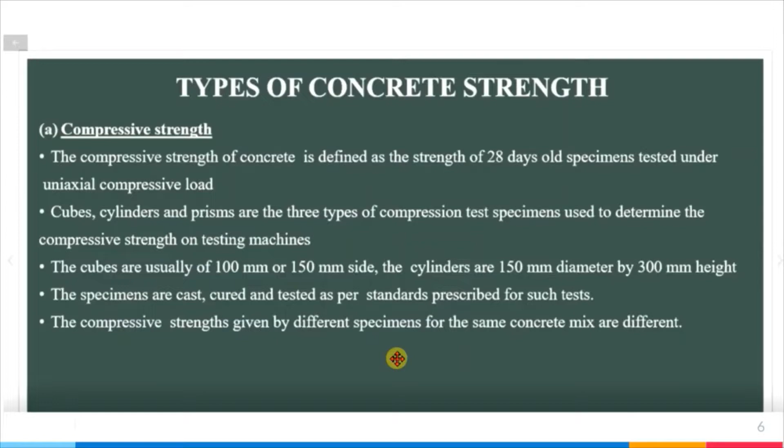The compressive strength of concrete is defined as the ability of the concrete to withstand specific compressive forces. Compressive strength of concrete depends on many factors such as water-cement ratio, cement strength, quality of concrete material, quality control during production of concrete, etc.

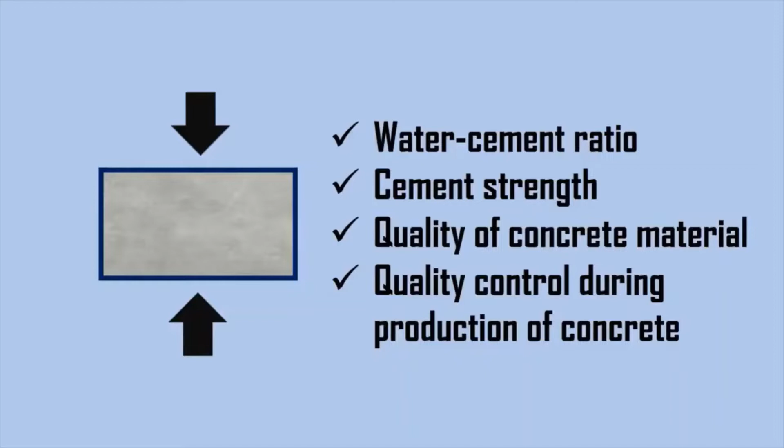Generally, the specimens shaped in cube and cylinder are used for testing the compressive strength of concrete. The standard size of a cubical specimen is 150 mm by 150 mm by 150 mm, while the cylindrical specimen is 150 mm in diameter and 300 mm in length.

Generally, the fresh concrete is prepared according to the required grades and the respective mix proportion. Once the fresh concrete is prepared, the inner surface of the mold is greased to avoid sticking of concrete. The prepared fresh concrete is then filled in the mold in 3 layers.

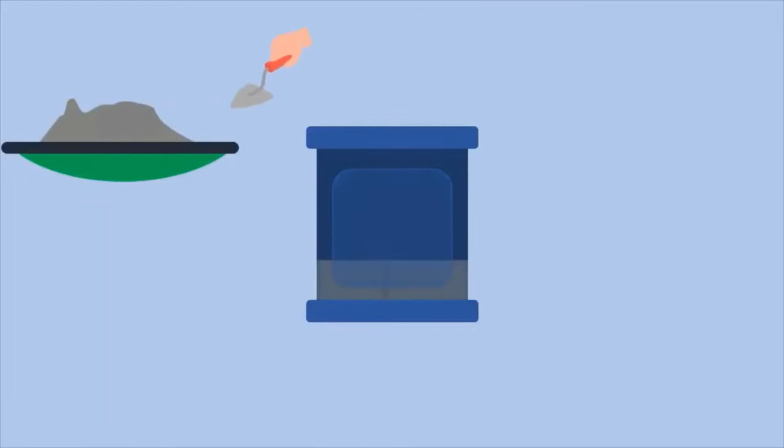After filling each layer, tamping should be done 35 times for cube and 25 times for cylinder using a standard tamping rod. Once the mold is filled, level off the top surface with a trowel.

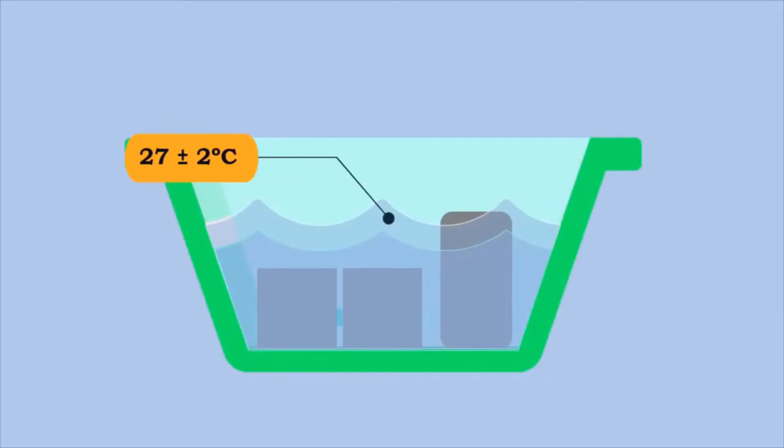After a day, the mold is removed and the specimens are dropped into the curing tank at a standard temperature of 27 plus or minus 2 degrees Celsius. After 7 days, the specimen is taken out of the curing tank and dried for a while.

Then the specimen is placed on the compression testing machine. The cube specimen is just placed on the bearing plate, while for the cylindrical specimen, it is placed vertically. The instrument is adjusted such that the plate touches the top surface of the specimen.

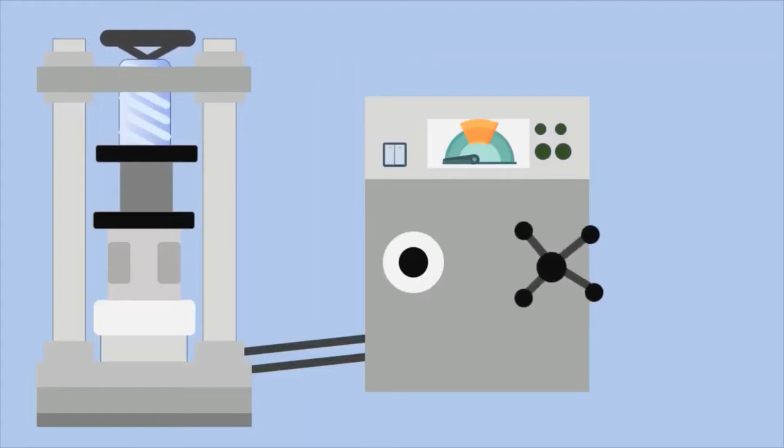The load is applied gradually over the specimen at the rate of 140 kg per centimeter square per minute. The load at which the specimen fails is noted. Thus, the characteristic compressive strength is calculated from the ratio of load and area.

The test is generally done with the help of 3 specimens and tested for 7 days, 14 days and 28 days. Next is tensile strength.

The tensile strength of concrete is much lower than the compressive strength, because of the ease with which the crack can propagate under tensile loads. Tensile strength of concrete is measured in 3 ways.

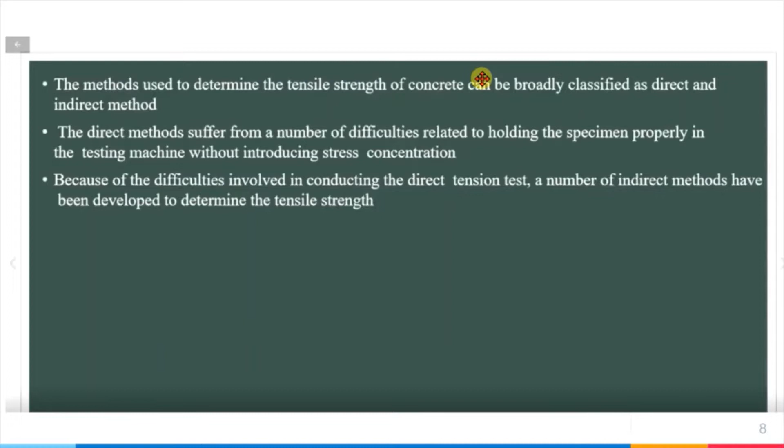Split tensile strength test on concrete. In the split tensile strength test, the tensile strength of concrete is obtained by applying a compressive force along the length of the concrete cylinder.

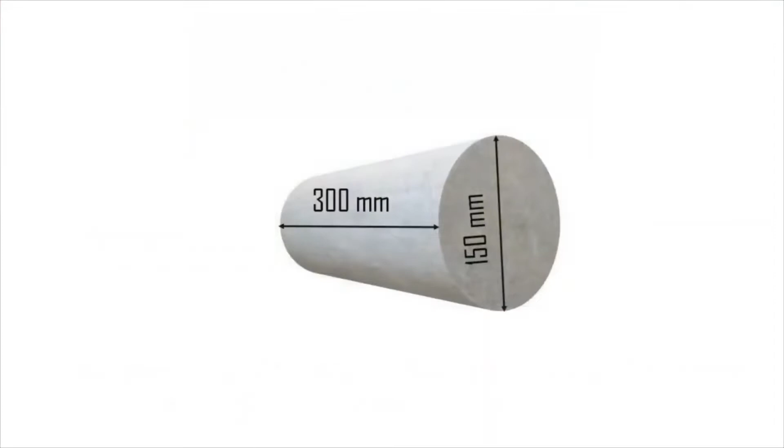The specimen used for this method is cylindrical in shape with dimensions of 150 mm in diameter and 300 mm in length.

The instrument used for this method is the universal testing machine. The specimen is prepared in the standard manufacturing procedure and placed in the mold in layers, tamped using 25 blows for each layer.

After a day, the mold is removed, and the specimen is placed in the curing tank at a temperature of 27 plus or minus 2 degrees Celsius.

Depending upon the requirement, the test specimen is removed from the tank and dried at 7, 14 and 28 days for testing.

The specimen is placed longitudinally in the machine. A bearing strip made up of plywood is placed on both sides of the specimen and aligned according to the marking.

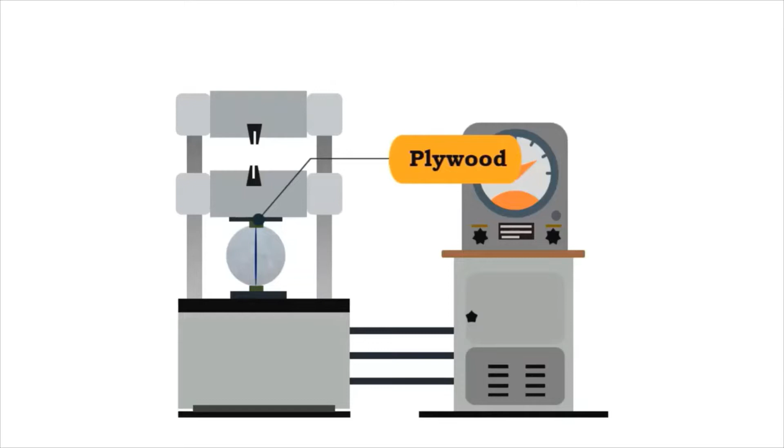Sometimes, supplementary bars are placed on top of the plywood depending upon the diameter of the specimen. Now, apply the load continuously at a rate within the range of 1.2 to 2.4 MPa per minute.

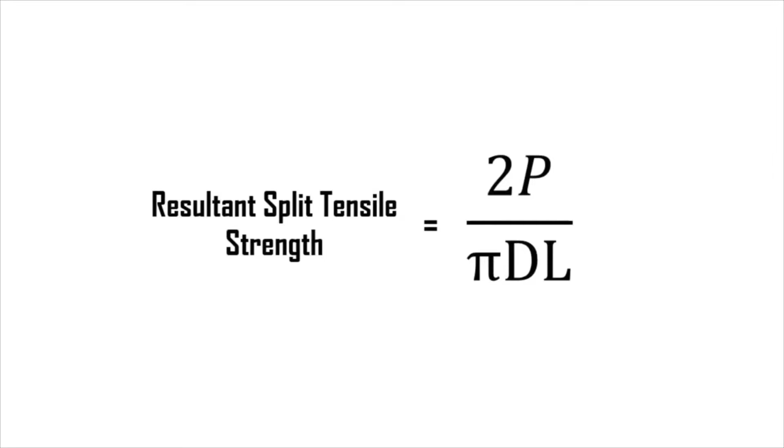Finally, note down the load at which the cylinder fails by developing cracks. The resultant split tensile strength is calculated by the equation 2P divided by pi into D into L, where P is equal to the load at which the specimen breaks.

And the third one is flexural strength. The determination of flexural tensile strength is essential to estimate the load at which the concrete members may crack.

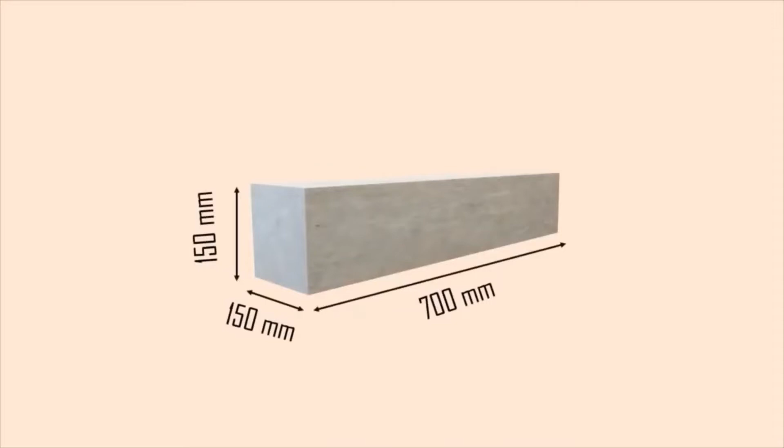The test is made on a beam of size 150 mm into 150 mm into 700 mm, or 100 mm into 100 mm into 500 mm.

Flexural strength of concrete is determined by either central point loading or two-point loading. The typical machine used for this test is shown on the screen.

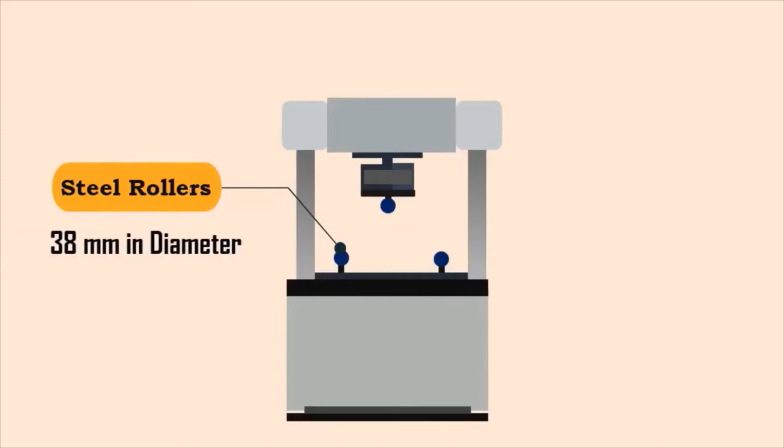The bed of the testing machine is provided with two steel rollers of 38 mm in diameter. The rollers are mounted at a distance from center to center of 600 mm for 150 mm specimens and 400 mm for 100 mm specimens.

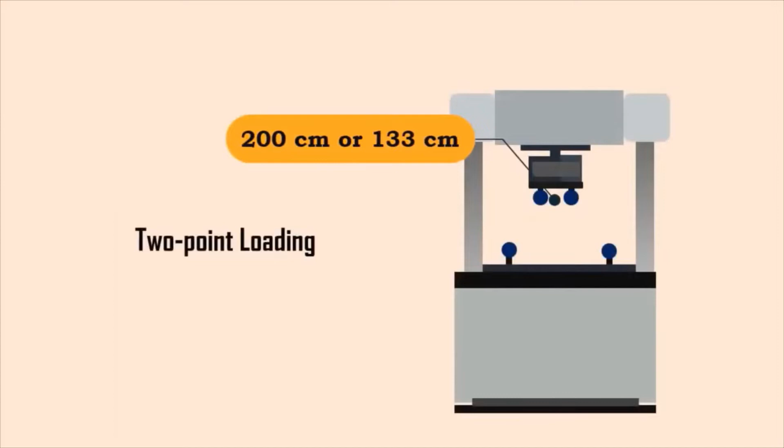The load is applied through a similar roller mounted at the top. In case of two-point loading, the rollers are spaced at 200 mm or 133 mm center to center.

The concrete is prepared as per the required grade of concrete and placed in the mold in layers, tamped 25 blows for each layer.

After a day, the mold is removed, and the specimen is placed in the curing tank at a temperature of 27 plus or minus 2 degrees Celsius.

Depending upon the requirement, the test specimen is removed from the tank and dried at 14 and 28 days for testing.

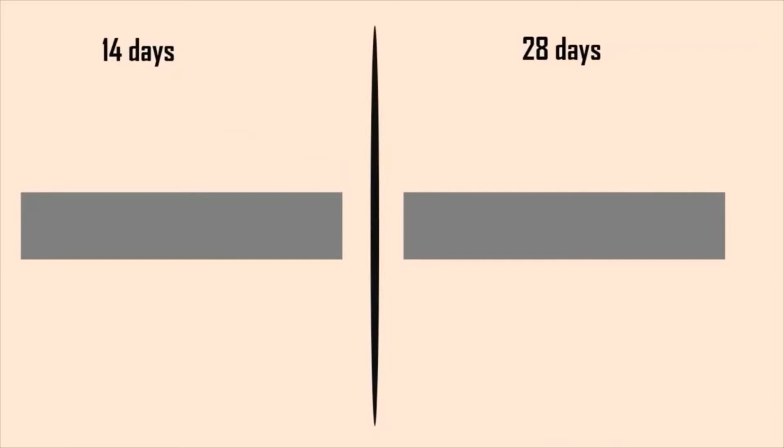The specimen is placed on the rollers and centered with the longitudinal axis of the specimen.

The load is applied at a rate of 400 kg per minute for the 150 mm specimens, and at a rate of 180 kg per minute for the 100 mm specimens.

Finally, note down the load at which the specimen fails by developing cracks. Now, measure the distance between the line of fracture and the nearest support. Consider this as A.

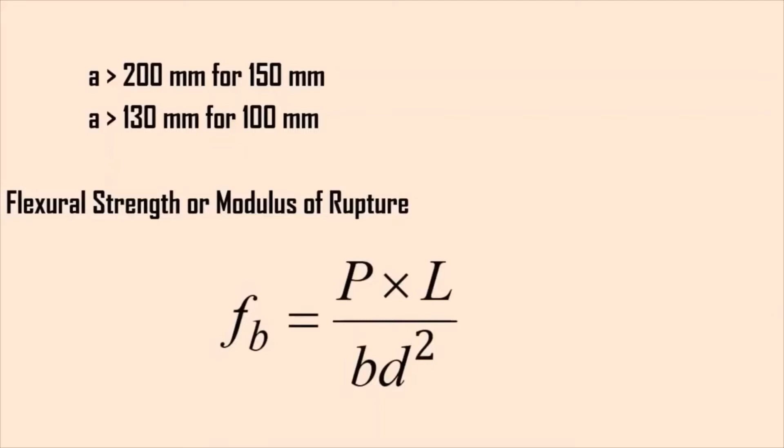If A is greater than 200 mm for the 150 mm specimen and 130 mm for the 100 mm specimen, then the flexural strength or modulus of rupture, Fb, is calculated by the equation Fb equals P into L divided by B into d squared.

If A is less than 200 mm and greater than 170 mm for 150 mm, and less than 133 mm and greater than 110 mm for a 100 mm specimen, then flexural strength or modulus of rupture, Fb, is calculated by the equation Fb equals 3Pa divided by Bd square,

where B is the width of the beam in millimeters, D is the failure point depth in millimeters, L is the supported length in millimeters, P is the maximum load applied to the beam in kilograms, and A is the distance between the line of fracture and nearest support in millimeters.

Next is factors affecting strength of concrete.

Strength of concrete.

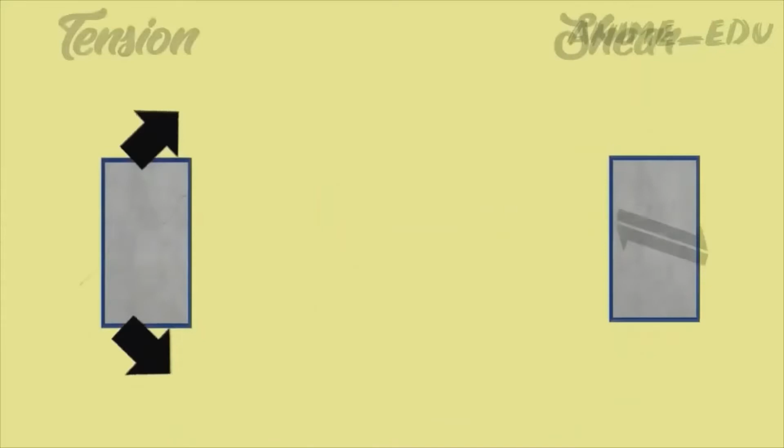The quality of concrete is judged largely on the strength of that concrete. We all know that concrete is strong in compression but weak in tension. In most structural applications, concrete is employed primarily to resist compressive stresses. In cases of concrete in tension or shear, the compressive strength is frequently used to measure these properties. Thus, the compressive strength of concrete is used as a qualitative measure for the various properties of hardened concrete.

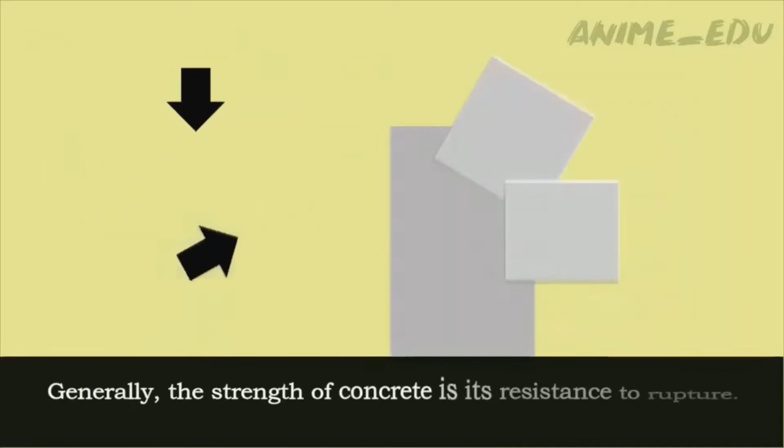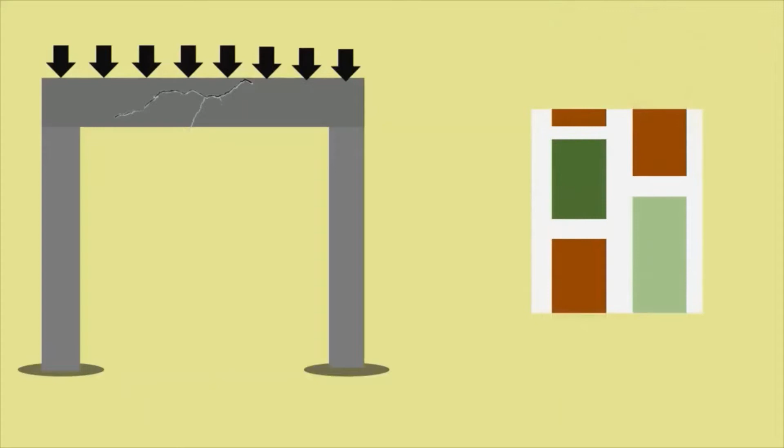Generally, the strength of concrete is its resistance to rupture. It can be measured in a number of ways, such as strength in compression, strength in tension, strength in shear, and strength in flexure. These strengths of concrete are calculated by various methods which will be discussed in future videos.

When concrete fails under a compressive load, the failure is essentially a mixture of crushing and shear failures. However, the mechanics of failure is a complex phenomenon. In general, concrete in resisting failure generates both cohesion and internal friction. This cohesion and internal friction are related to a single parameter called the water-cement ratio.

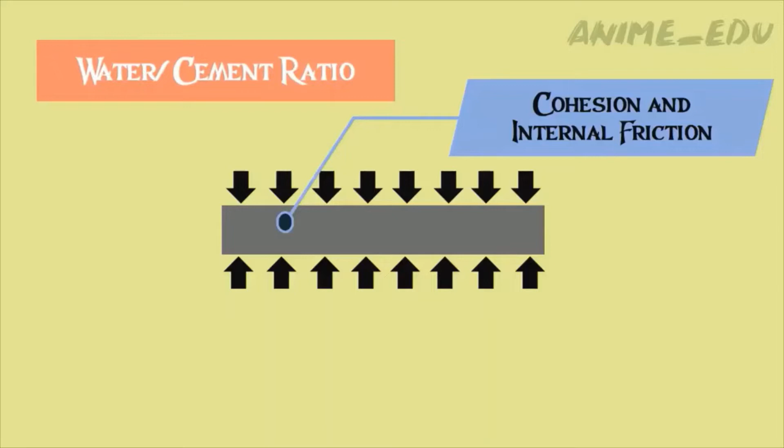Besides, the strength of concrete is influenced by the following factors: ratio of cement to mixing water, ratio of cement to aggregate, grading, surface texture, shape, strength and stiffness of aggregate particles, and maximum size of aggregate. The water-cement ratio primarily affects the strength, whereas other factors indirectly affect the strength of concrete by affecting the water-cement ratio.

Water-cement ratio of concrete.

As we have seen in the previous video on strength of concrete, the strength of concrete is mostly influenced by the water-cement ratio. Let's deal with it in this video. The water-cement ratio is also responsible for the porosity of the hardened cement paste.

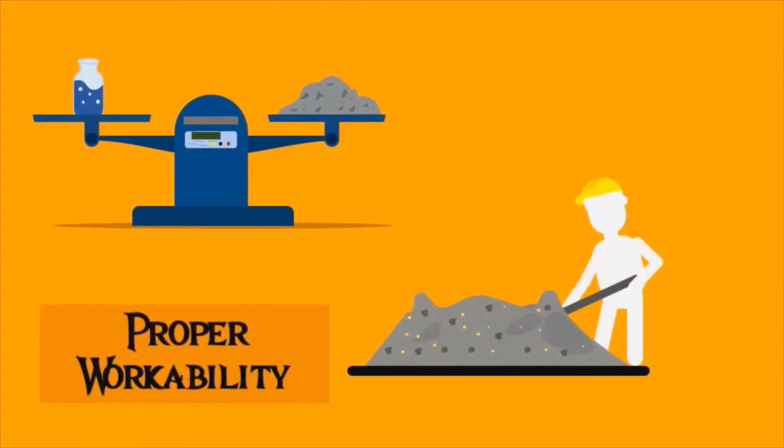Water-cement ratio is stated as the amount of water used to the significant amount of cement in the mixture by weight. For proper workability, the water-cement ratio varies from 0.4 to 0.6. However, the maximum strength of concrete is obtained at a water-cement ratio of 0.4. Besides, we know that for complete hydration of concrete, the water requirement is about 38%.

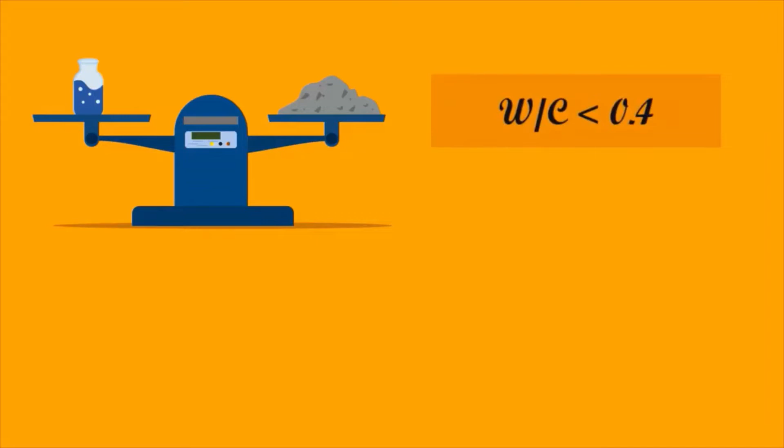Space ratio of concrete. Abrams' water-cement ratio law has several limitations. Researchers do not agree to call it a law, rather they said it to be a rule.

In general, the strength at any water-cement ratio is a function of degree of hydration of the cement and its physical and chemical properties, temperature at which hydration takes place, formation of cracks due to bleeding and shrinkage, air content in case of air-entrained concrete, and change in the water-cement ratio.

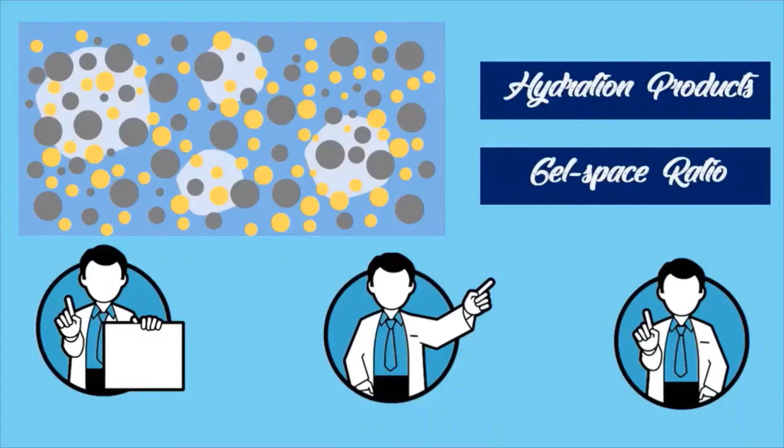With these, some researchers stated that the strength of concrete can be related to the hydration products, that is, gel space ratio. Gel space ratio is defined as the ratio of volume of hydrated cement paste to the sum of the volumes of the hydrated cement and that of the capillary pores.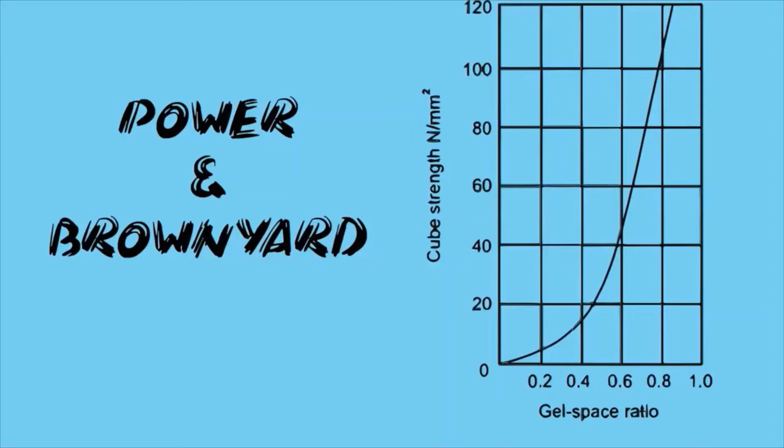A relationship between the strength of concrete and gel space ratio is established by Power and Brownyard. A typical curve relating gel space ratio to the compressive strength is displayed. The strength of concrete considering gel space ratio is calculated by S equals 240 x cube, where S is the strength of concrete, X is the gel space ratio, and 240 is the intrinsic strength of gel in Newton per millimeter square for the type of cement and specimen used.

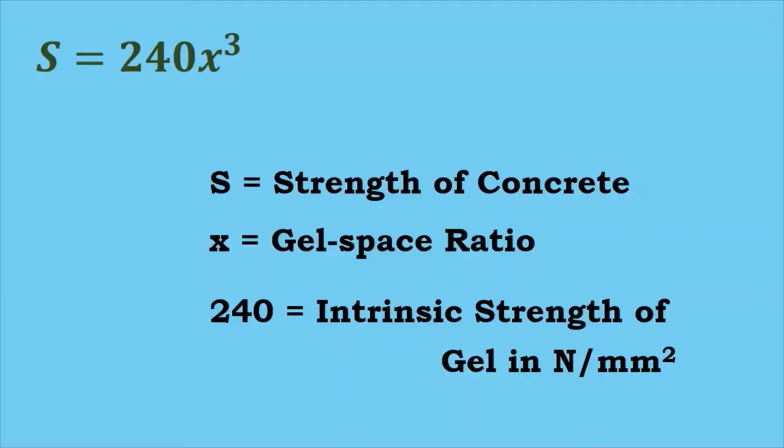Effect of maximum size of aggregate on strength of concrete. In earlier days, researchers thought that the use of larger size aggregates leads to higher strength. They thought that the larger the aggregate, the lower is the total surface area.

Thus, a lesser amount of water is required to get the desired workable concrete. So a lower water-cement ratio can be adopted to get higher strength.

Over the period, researchers found that large size aggregate does not contribute to higher strength of concrete in real applications. This is due to the maximum size aggregate giving a lower surface area for development of gel bonds, which is responsible for the lower strength of the concrete.

Bigger aggregate size causes more heterogeneity in the concrete, which prevents the uniform distribution of load when stressed. There is also a possibility of internal bleeding and development of microcracks, which results in lower compressive strength.

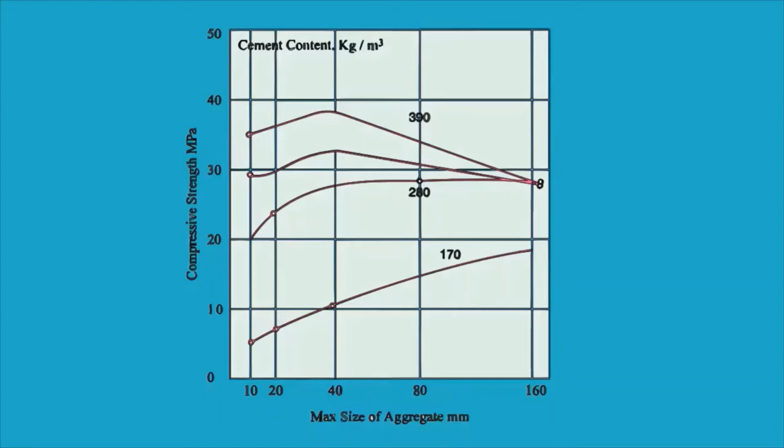The influence of the maximum size of aggregate on compressive strength of concrete is shown in the graph. The graph represents the influence of the size of aggregate on the compressive strength of concrete for different cement contents. Effect of compaction on strength of concrete.

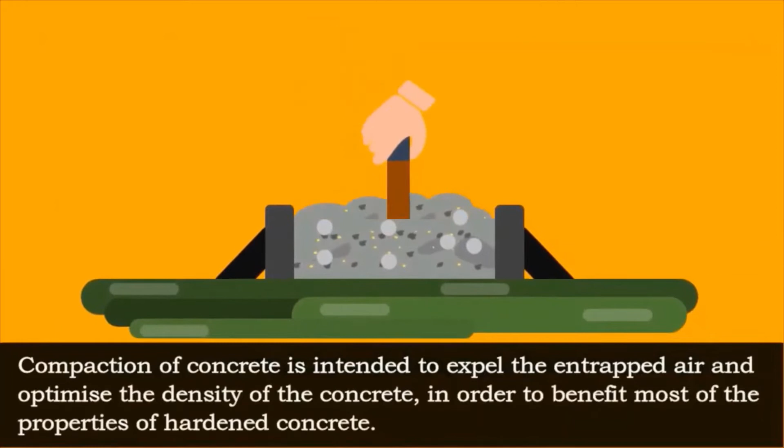We know that compaction of concrete is intended to expel the entrapped air and optimize the density of the concrete, in order to benefit most of the properties of hardened concrete. We have seen more about this in the video on compaction of concrete.

Inadequate compaction leading to air void contents of 5% and 10% result in a loss of strength of 30% and 50%, respectively.

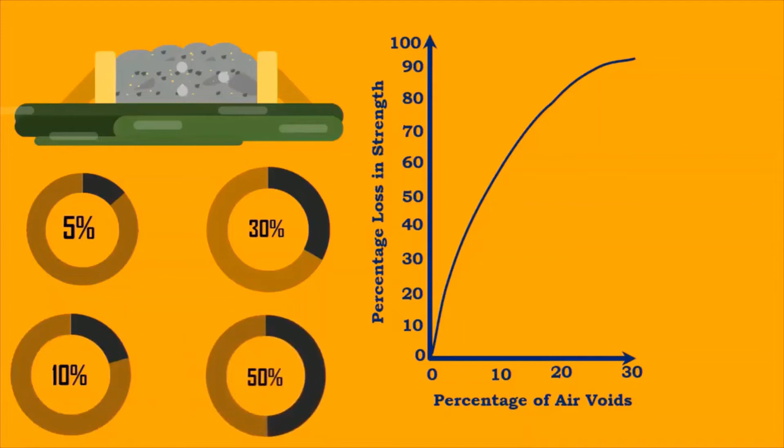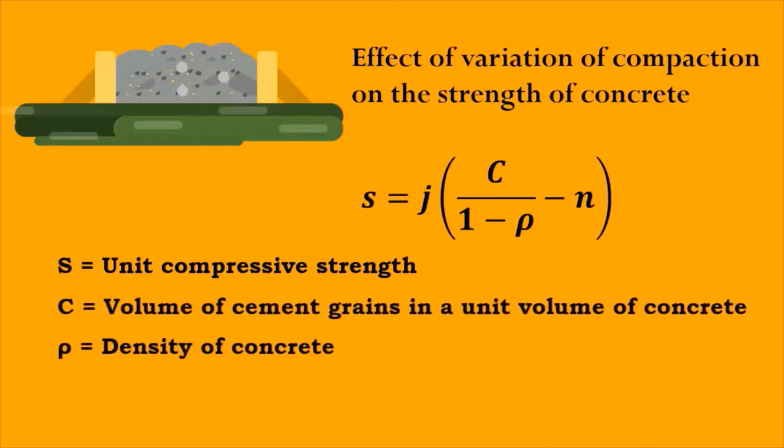The effect of variation of compaction on the strength of concrete is calculated with the help of the equation S equals J into C divided by 1 minus rho minus N, where S is the unit compressive strength, C is the volume of cement grains in the unit volume of concrete, rho is the density of concrete, and J and N are constants.

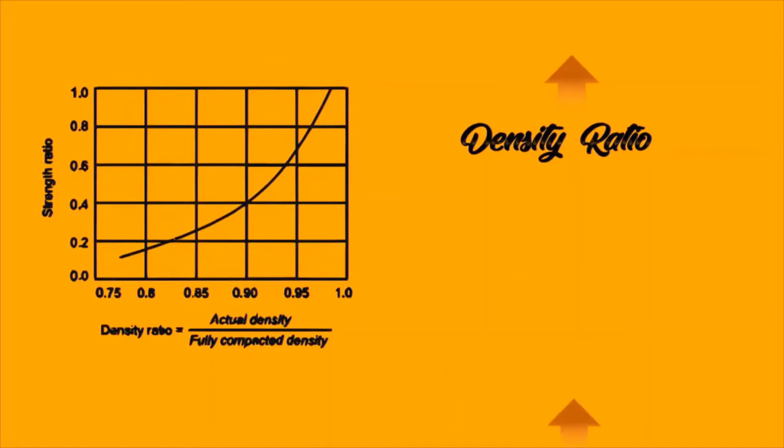The effect of degree of compaction on strength is given by the graph shown on the screen. The higher the density ratio, the higher would be the concrete strength ratio. Highly compacted concrete yields a higher density ratio, which in turn results in higher strength of concrete.

Effect of mixing time on strength of concrete. Generally, if the concrete is mixed for a longer period, it results in being uneconomical from the point of production rate. Therefore, it is important to mix the concrete for such a duration which will accrue optimum benefit.

The strength of concrete increases with increase in time of mixing up to 2 minutes, beyond which no significant improvement is observed.

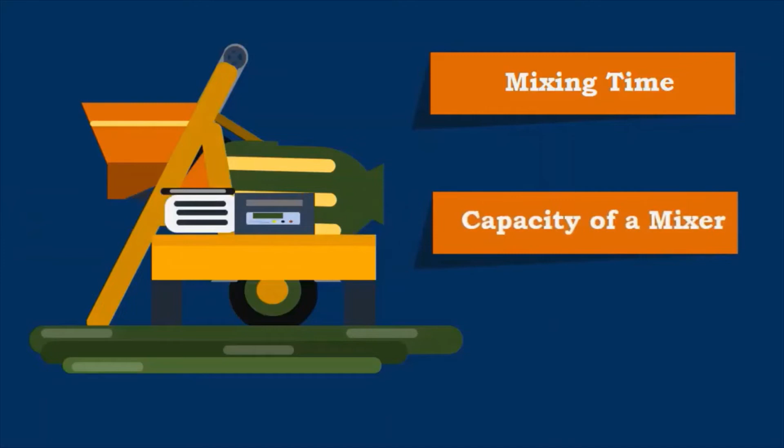In case of a machine mixer, the mixing time is related to the capacity of the mixer. The mixing time varies between 1 minute 30 seconds to 2 minutes 30 seconds. Bigger the capacity of the drum, more is the mixing time.

The increase in strength with respect to increase of mixing time may be due to the improvement of workability because of excess fines formed due to the abrasion and attrition of coarse aggregate in the mix.

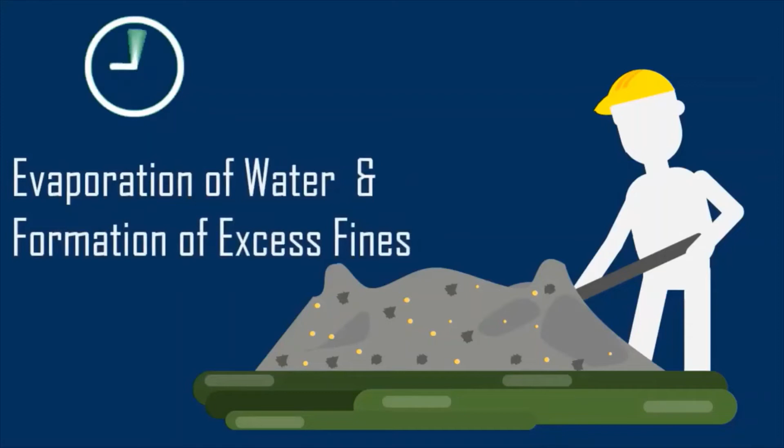However, mixing of concrete over long periods results in evaporation of water and formation of excess fines, which may reduce the workability and hence bring about a reduction in strength. The excess fines may also cause greater shrinkage. Thus, it is important to maintain optimal mixing time.

Effect of air voids on strength of concrete. Air voids are generally formed because of the evaporation of water used in making concrete and by entrained air.

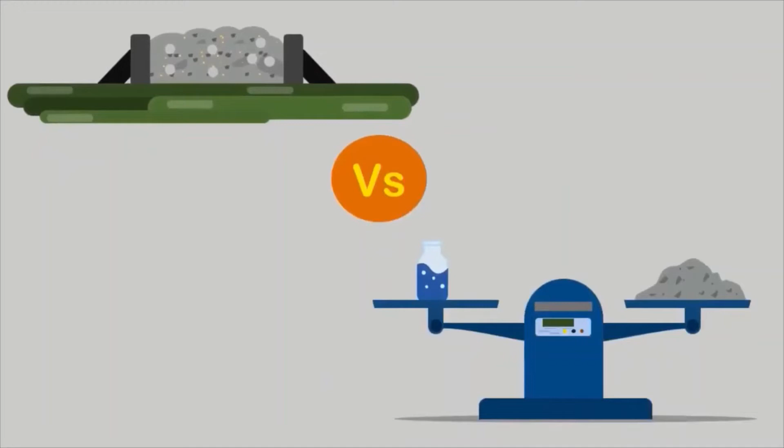In general, air voids in the concrete depend on the water-cement ratio. There is an increase in air voids with an increase in the weight of water. When this situation happens, the strength of the concrete drops down.

However, hardened concrete contains about 1% of air voids. If the water used is more than the optimum water required for maximum strength of concrete, the concrete becomes permeable and susceptible to deterioration.

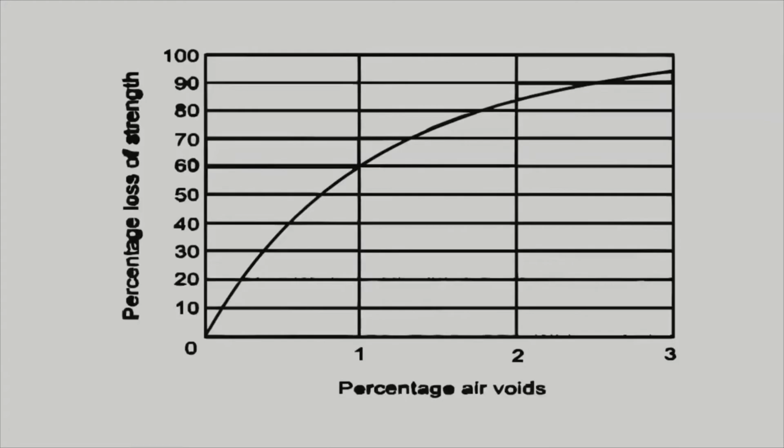Maturity concept of concrete. The strength of concrete depends upon both time and temperature during the early period of gain in strength. The maturity of concrete is defined as the summation of the product of time and temperature.

Its units are degree Celsius hour or degree Celsius days.

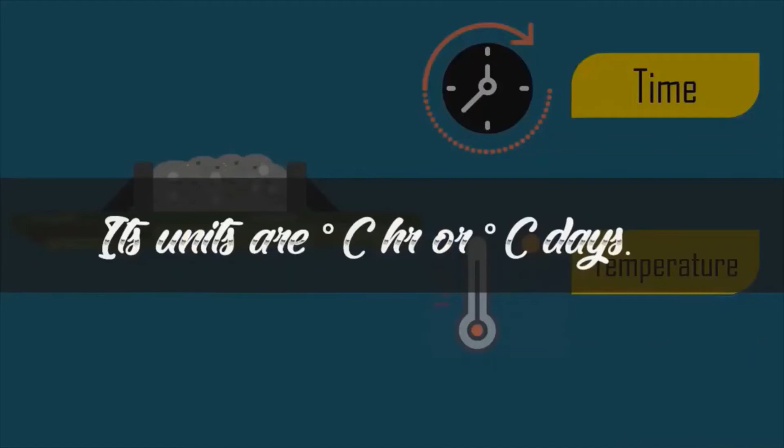Relation between compressive and tensile strength of concrete. We know that concrete is strong in compression, weak in tension. Thus, in most concrete construction, the compressive strength of concrete is taken into consideration, and the tensile strength of concrete is ignored.

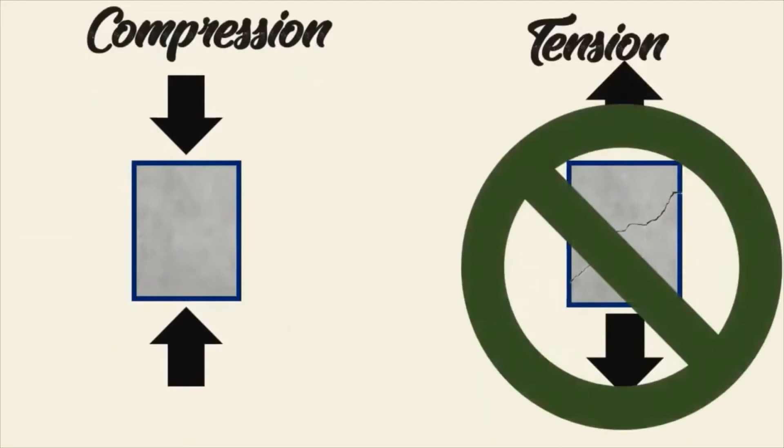Besides, the design of concrete pavement slabs and roads depends on the flexural strength of concrete. Therefore, it is important to calculate the flexural strength of concrete. We have some methods for determining the flexural strength of concrete.

However, the determination of compressive strength of concrete is easier. Thus, obtaining a relationship between compressive strength and flexural strength will help to determine the strength of concretes. Today we are going to see the relationship between compressive strength and flexural strength.

It is seen that strength of concrete in compression and tension, both direct tension and flexural tension, are closely related. From the extensive study carried out at Central Road Research Institute (CRRI), the following statistical relationship between tensile strength and compressive strength was established.

Where Y is the compressive strength of concrete in MPa and X is the flexural strength of concrete in MPa, the general relationship between flexural and compressive strength of concrete is given as Y equals 11x minus 3.4.

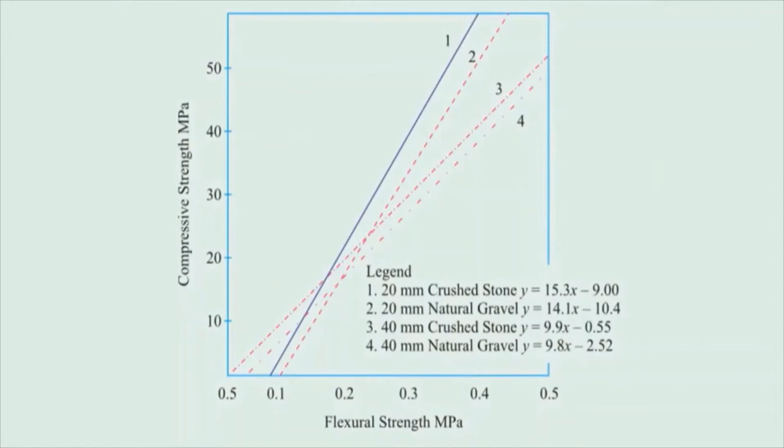The graph shown on the screen represents the relationship between compressive strength and flexural strength of concrete for various aggregates. In general, the flexural strength of concrete was found to be 8 to 11% of the compressive strength for higher ranges of concrete strength greater than 25 megapascals, and 9 to 12.8% for lower ranges of concrete strength less than 25 megapascals.

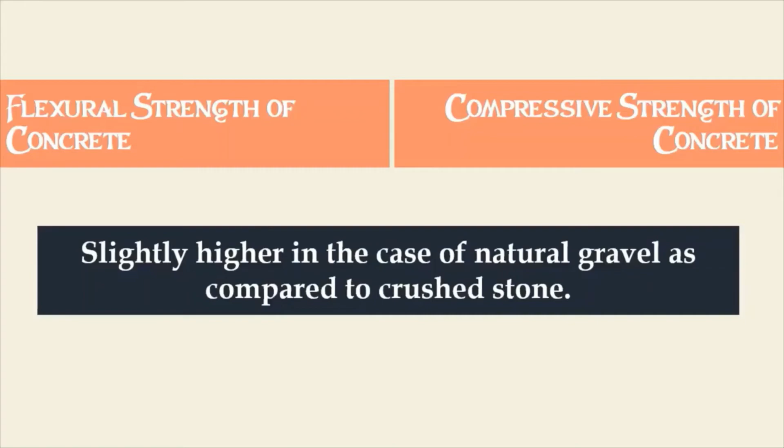The flexural to compressive strength ratio was higher with aggregate of 40 mm maximum size than with those of 20 mm maximum size. In general, the ratio was found to be slightly higher in the case of natural gravel as compared to crushed stone. Gain of strength of concrete with age.

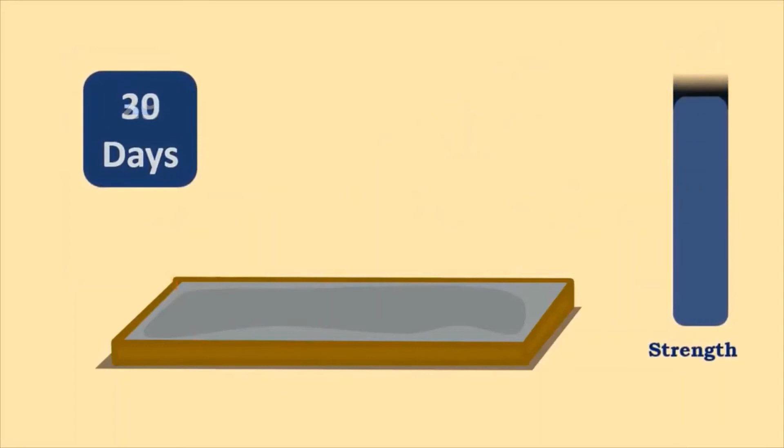In general, the strength of concrete is fast at the start and slows down with age. It is assumed that concrete attains its full strength in 28 days. Actually, this assumption is false. The concrete develops strength beyond 28 days too. However, the increase in strength beyond 28 days is not considered in the design.

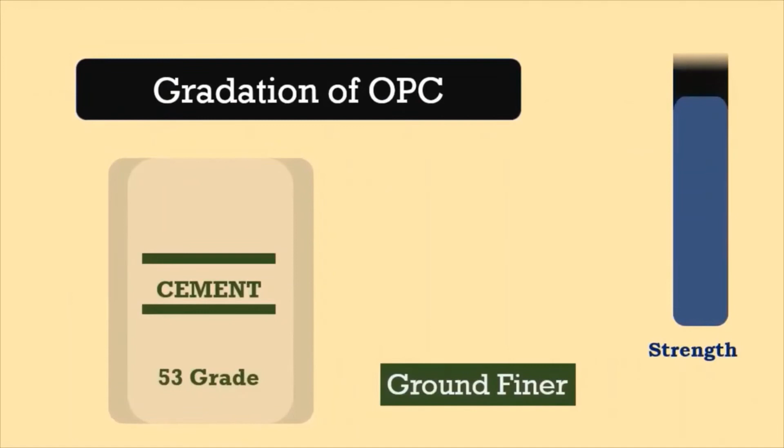As per the IS 269, 1976 code, only one type of cement was considered to have increased strength after 28 days. However, after the gradation of OPC, present-day cements, particularly 53 grade cement, being ground finer, show only nominal increase in strength after 28 days. Most of the strength development in well-cured concrete will have taken place by 28 days.

Therefore, in IS 456:2000, the clause is revised. It states there is normally a gain of strength beyond 28 days. The quantum of increase depends upon the grade and type of cement, curing and environmental conditions, etc. The design should be based on 28-day characteristic strength of concrete unless there is evidence to justify a higher strength for a particular structure due to age.

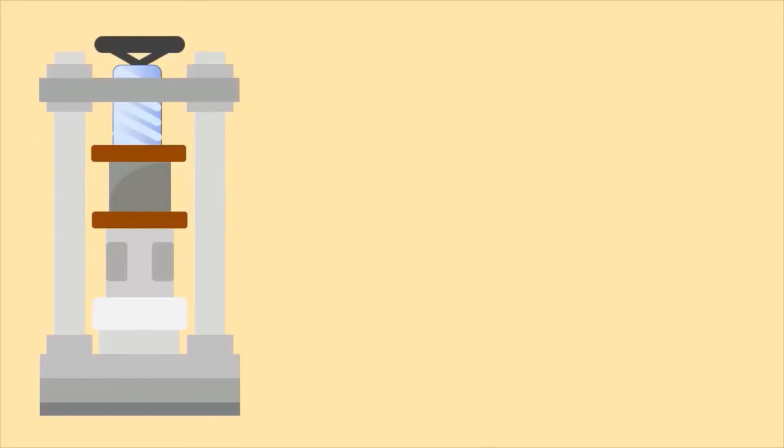Besides, it is also important to estimate the strength of concrete at an early age. It is not necessary to wait for 28 days to check the strength of concrete. Many researchers have attempted to estimate the strength of concrete at 1, 3 or 7 days and correlate it to 28-day strength.

These relations depend upon many factors such as the compound composition of cement, fineness of grinding, and temperature of curing, etc.

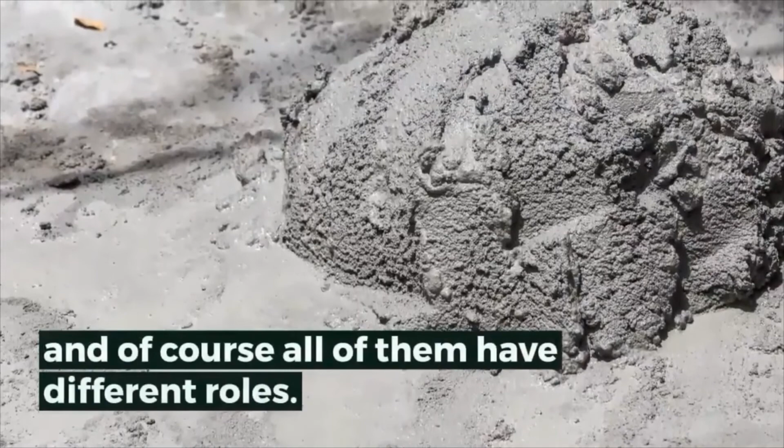Concrete is a widely used building material in the construction world. Concrete is made up of various ingredients, and of course, all of them have different roles. The properties of concrete generally rely on the mixing of concrete ingredients, such as cement, coarse aggregates, fine aggregates, and water.

The whole world wishes their structures to be strong and durable, and for that, they always design their structures according to the desired strength and service. Strength gives an overall indication of quality of concrete, as it is directly related to the lifelong performance of the concrete structure. The strength of the concrete shows the ability of the structure to withstand various loads such as dead load, live load, earthquake load, wind load, etc.

The strength of the concrete can be measured with different tests conducted on it, such as compressive strength, tensile strength, and flexural strength. Apart from the above tests, there are various factors that can also affect the strength of concrete. Highlights of those factors are described in this video. So, let's get started.

11 factors that can affect the strength of concrete.

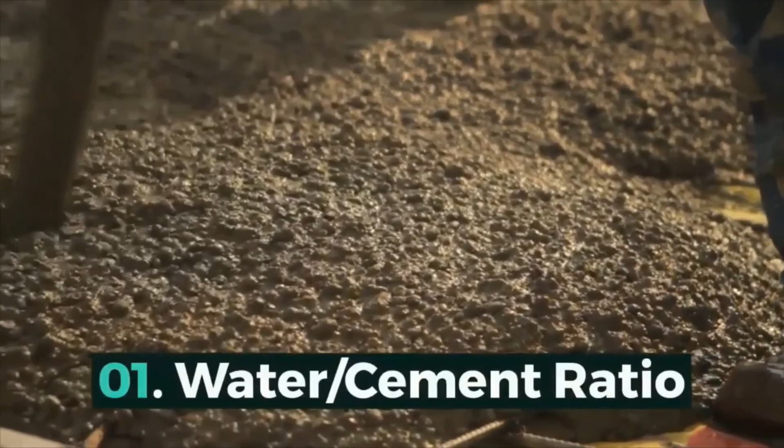Number 1: Water-cement ratio. The ratio of the weight of water to the weight of cement is called water-cement ratio. It is the most important factor for gaining the strength of concrete. The lower water-cement ratio leads to the higher strength of concrete.

Generally, a water-cement ratio of 0.45 to 0.60 is used. Too much water leads to segregation and voids in concrete. Water-cement ratio is inversely proportional to the strength of concrete.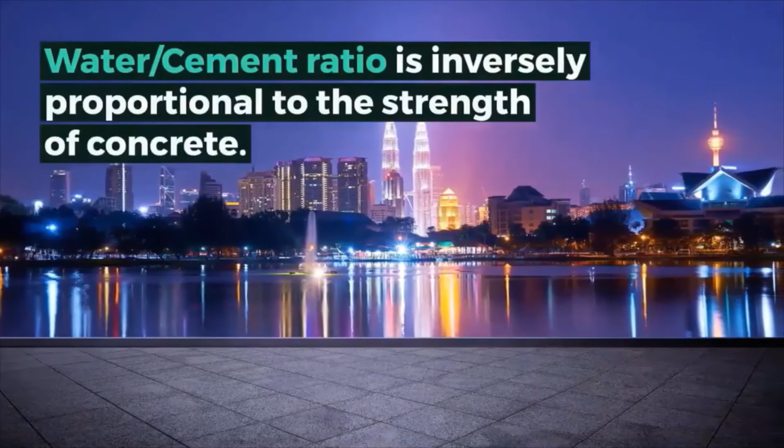Number 2: Compaction of concrete. Compaction increases the density of the concrete, because it is the process in which air voids are removed from freshly placed concrete, which makes the concrete compact and dense.

The presence of air voids in concrete greatly reduces its strength. Approximately 5% of air voids can reduce the strength by 30 to 40%, as we can see in the chart. Even at the same water-cement ratio, strength differs with different compaction accuracies.

In fully compacted concrete, strength is higher than in insufficiently compacted concrete.

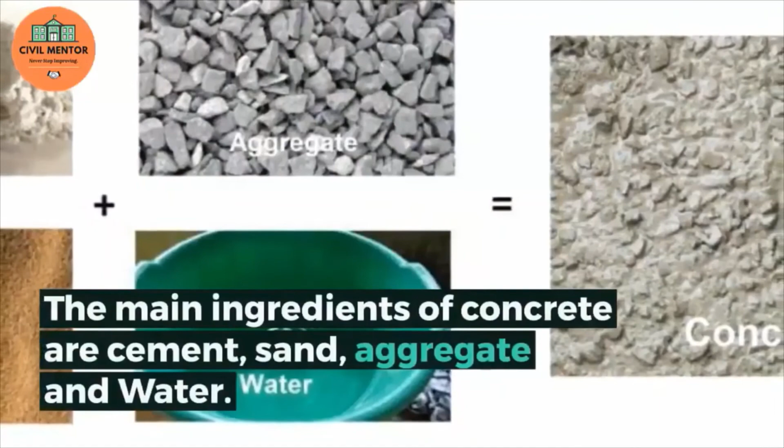Number 3: Ingredients of concrete. The main ingredients of concrete are cement, sand, aggregate, and water. Quality of each material affects the strength of the concrete. All materials, therefore, should fulfill the standard criteria for use in concrete.

Number 4: Curing of concrete. Curing is the most essential process to prevent plastic shrinkage, for temperature control, strength development, and durability. Curing provides the desired moisture and temperature at depth and near the surface, after placing and finishing of concrete, for development of strength.

In other words, curing provides sufficient water to concrete for completing the hydration process without interruption, which is important for strength development.

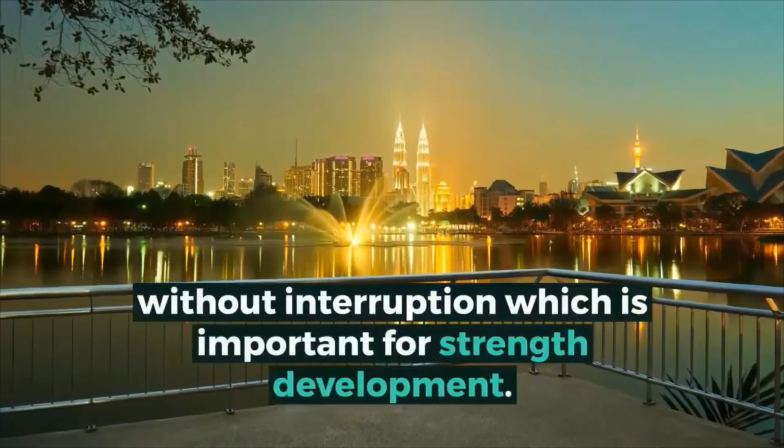Commonly, 7-day curing corresponds to 70% of compressive strength. Curing period depends on the type of cement and the nature of work. Generally, it's about 7 to 14 days for ordinary Portland cement.

There are many methods of curing, like ponding and immersion, spraying and fogging, saturated wet coverings, etc. So please remember, use as little water as possible during concrete mixing, and as much as possible after concreting.

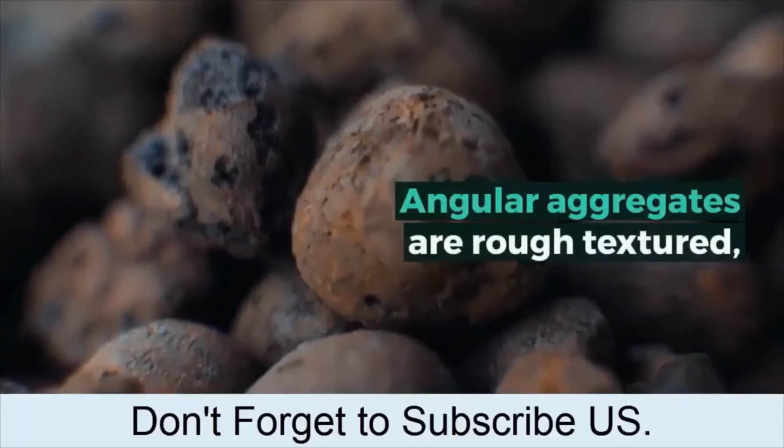Number 5: The shape of aggregate. There are many shapes of aggregate, like angular, cubical, elongated and flaky, irregular, and rounded. Angular aggregates are rough textured, and rounded aggregates are smooth textured.

Thus, rounded aggregates create the problem of lack of bonding between cement paste and aggregate. Angular aggregates exhibit a better interlocking effect in concrete, but angular aggregate contains a larger amount of voids.

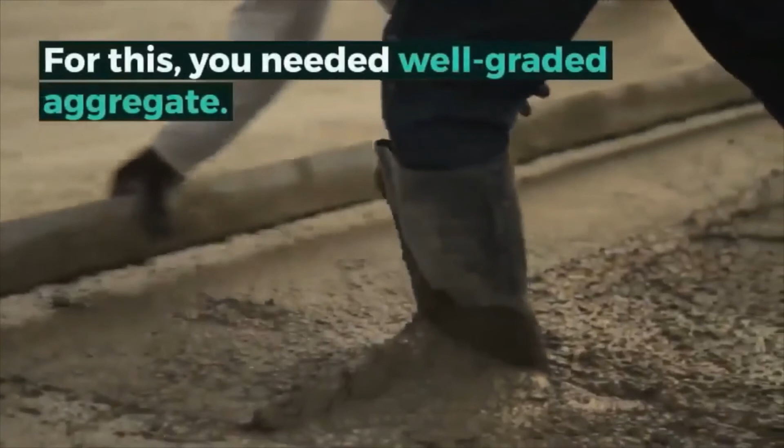For this, you need well-graded aggregate. The shape of aggregates becomes more important in case of high strength and high performance concrete, where a very low water-cement ratio is used. In such cases, cubical shape aggregates with uniform grading are required for better workability.

Number 6: Maximum size of aggregates. Larger size aggregates give lower strength because they have a lower surface area for development of the gel bond, which is responsible for strength.

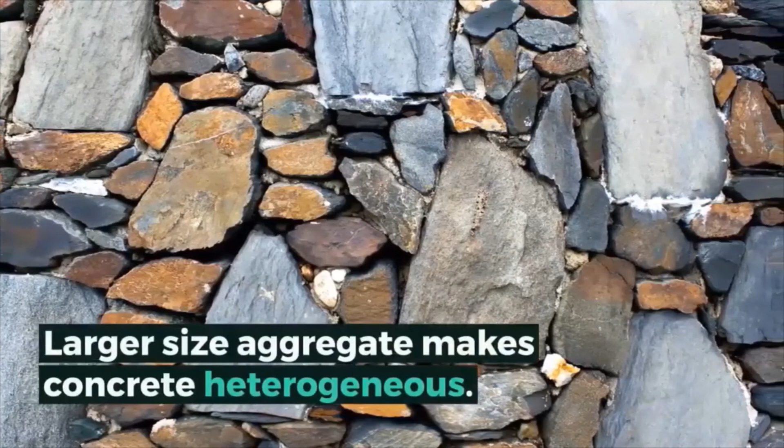Larger size aggregate makes concrete heterogeneous. It will not distribute loading uniformly when stressed. Due to internal bleeding, the problem of development of micro cracks in concrete happens when larger size aggregates are used.

Number 7: Grading of aggregate. Grading of aggregates determines the particle size distribution of aggregates. It's the most important factor for concrete mix.

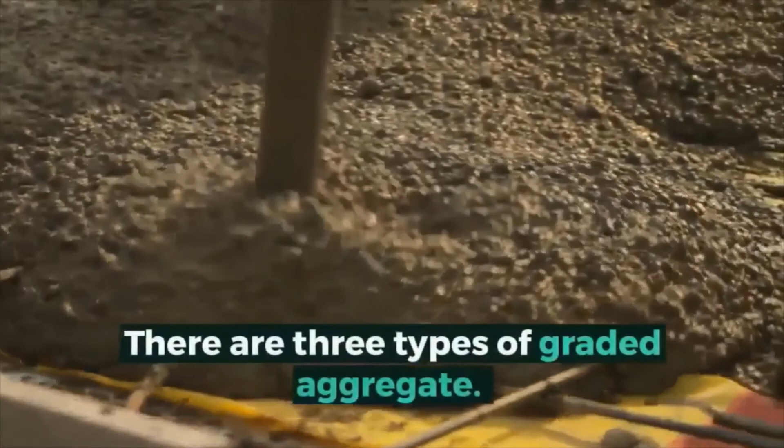There are 3 types of graded aggregate: gap-graded aggregate, poorly graded aggregate, and well-graded aggregate. Well-graded aggregate contains all sizes of aggregate particles, so it has a lesser amount of voids. The use of well-graded aggregates gives higher strength to the concrete.

Number 8: Weather condition. Weather condition also affects the strength of concrete due to different reasons. In cold climate, exterior concrete is subjected to repeated freezing and thawing action due to sudden changes in weather, which produces deterioration in concrete.

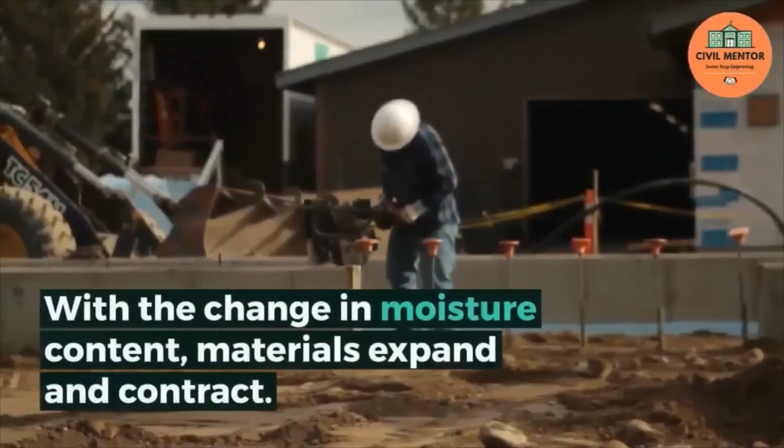With the change in moisture content, materials expand and contract. This produces cracks in concrete.

Number 9: Temperature. With a certain degree of temperature increase, the rate of the hydration process increases, in which concrete gains strength rapidly.

Sudden temperature changes create a thermal gradient, which causes cracking and spalling of concrete, so that the final strength of concrete is lower at very high temperatures.

Number 10: The rate of loading. The strength of concrete increases with an increase in the rate of loading, because at high rates of loading, there is less time for creep.

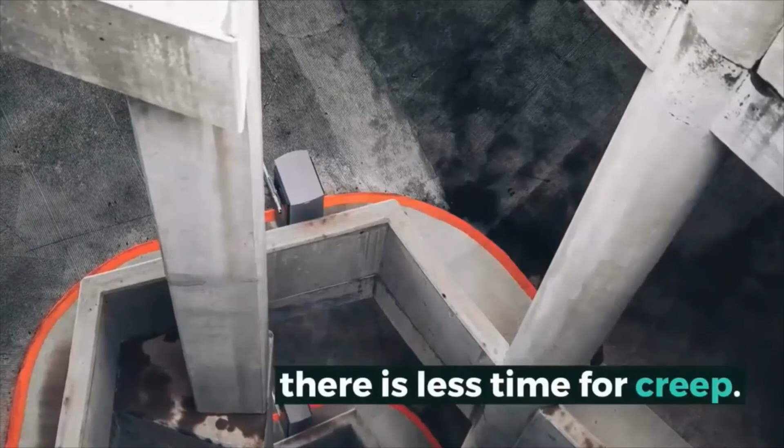Creep produces permanent deformation in the structure at constant loading, so that failure occurs at limiting values of strain, rather than stress.

In rapid loading, the load resistance is better than in slow loading.

Number 11: Age of concrete. With increase in the age of concrete, the degree of hydration would be more.

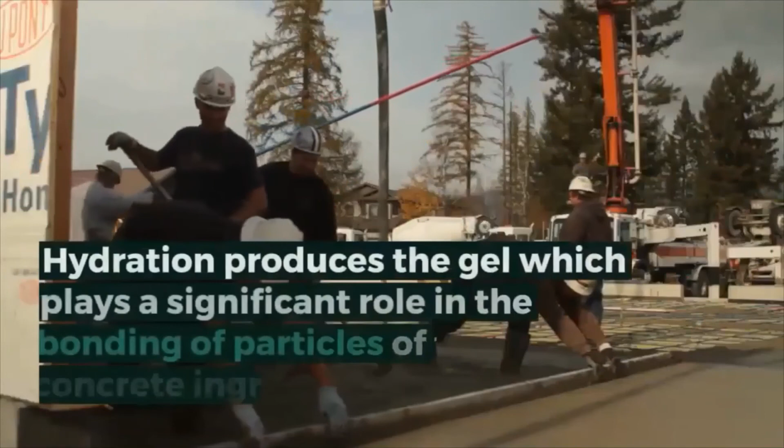Hydration is the chemical reaction of water and cement. It produces gel, which plays a significant role in the bonding of particles of the concrete ingredients. Therefore, the strength of concrete increases with its age.

Normally, concrete strength gets doubled after 11 years.